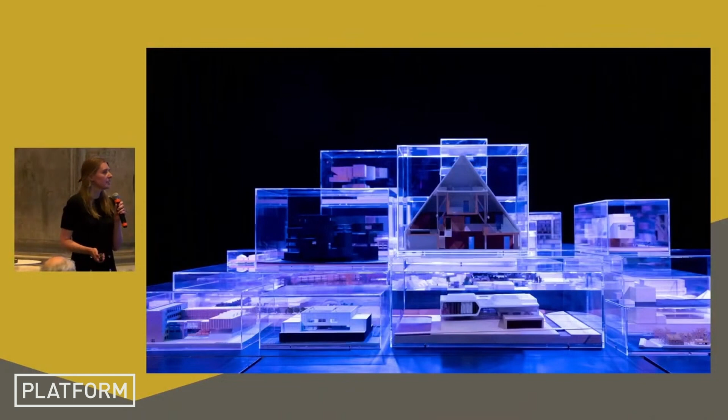What you can see is that every project is unique, and every project is unique because of a close collaboration with the users and with its context. What we find very important is that every project is tailor-made for the users, and that every project can also adapt over time, so that it can be in constant transformation.

We call it a cultural multiversum. And this cultural multiversum exists of a collage of activities, of atmospheres and scenes that you can also see here. And this constant collage is changing over time.

Basically, what you can see here, this is the timeline of the movie that you saw just before, because for us, a project and a building that is in constant use is the most sustainable to use effectively.

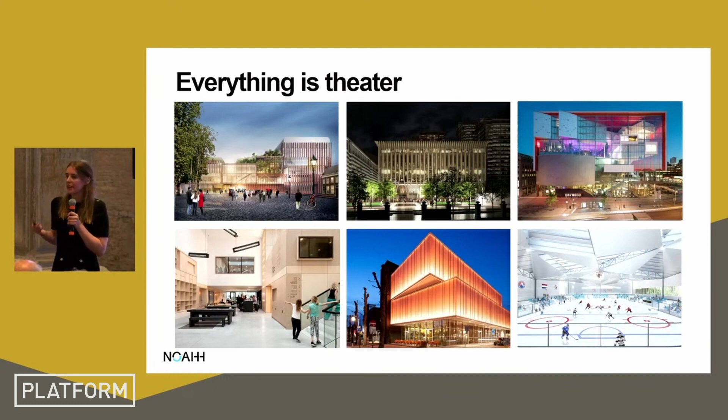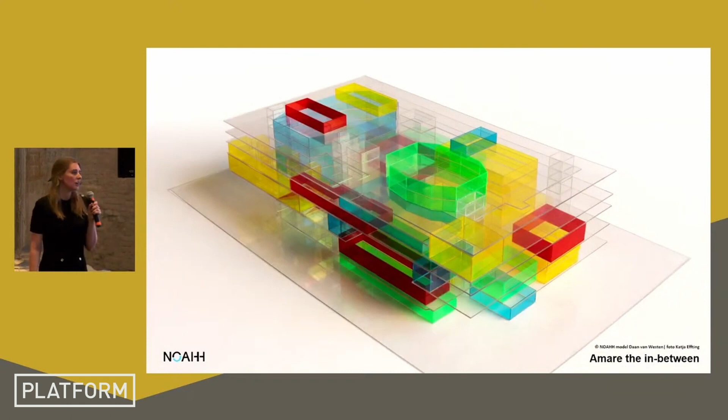And if we are talking about Amare, the building that we show on the exhibition, and where Patrick will also explain a bit more, is that this building is full of different small theater halls, and they can pop up and disappear in time. It's basically about the in-between space.

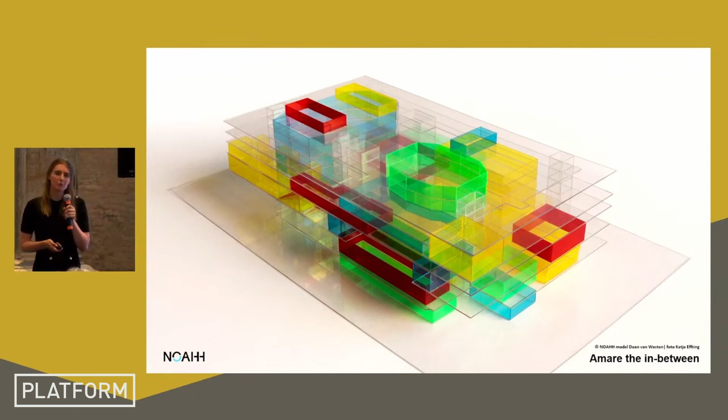It's not only about the main halls that you can see here, the different halls that are a close collaboration with the users, but it's basically about the spaces that are in between, and where different activities and different experiences can happen. So you can never experience everything in this building, so it means you always have to come back.

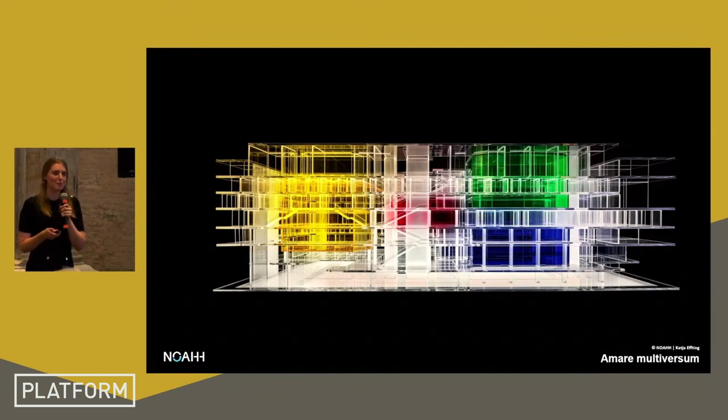This is a model that we have made, and you can see basically the link to the lava lamp that I just showed. So you can see also how this space could be fluid.

And we captured our Interstellar, our cultural multiversum in many different models, more than 100 different models, because we cannot explain this whole building in just one model. So we created an exhibition, also in collaboration with Luca Molinari, where we experience basically all different parts of the story and all different little tessellations of the building.

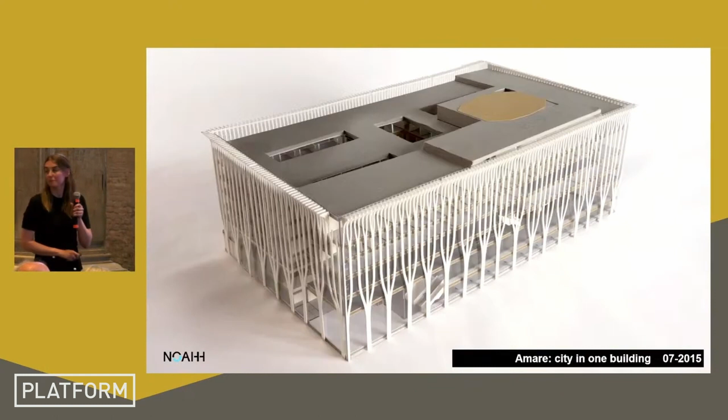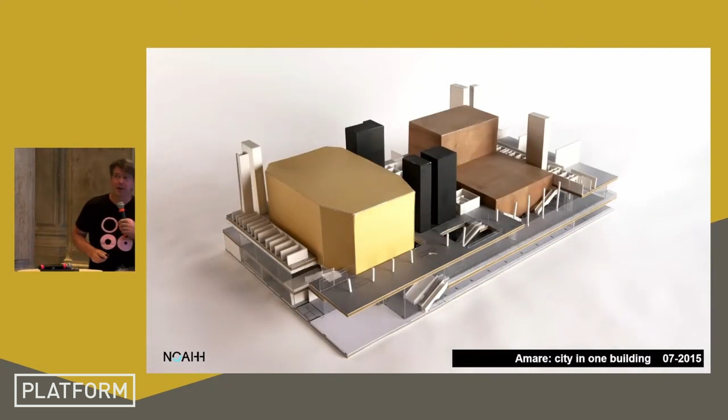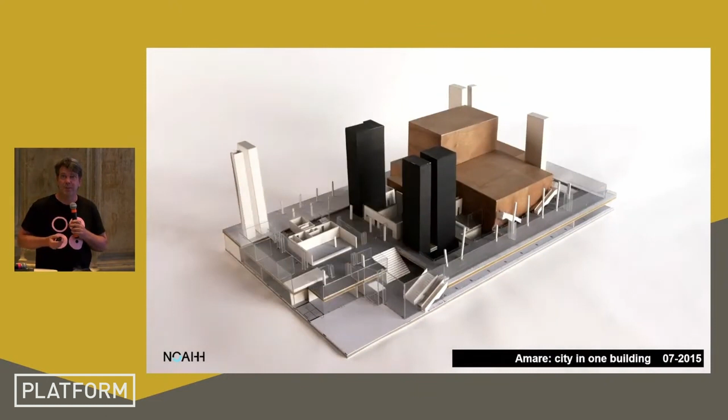Thank you. Talking about Amare, it's not a building - we consider it as a city within the envelope of a superstructure. It's like an inversed Piazza San Marco, whereas the facade contains all the elements like a city within a central, binding, identity-giving facade. But the interesting part is that this is the facade, and within this there's a new city.

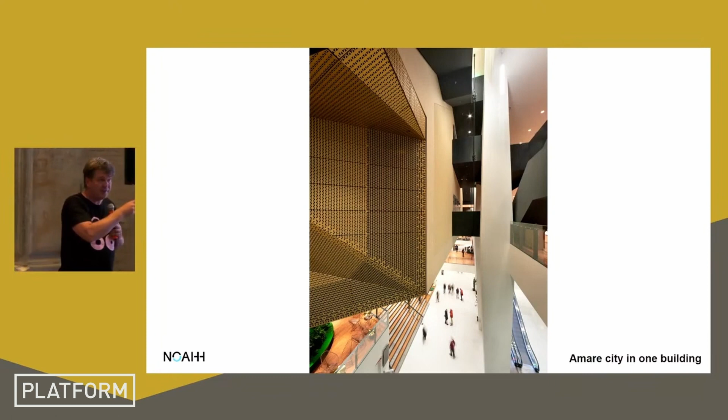Basically like in this building where on the attic we have seen that was a baseball field once, and it can be used in multiple ways during time. Inside this facade you can find these parts of the building - it's a kind of completely different world which can be experienced and explored in many ways.

In the building you can see that there is street theater and activities popping up, not organized, very informal, attracting like the informality in this drawing you have seen. It can also be sketched in this building, so that there are professionals acting, students working, people from the neighborhood playing, and they all do their activities during time at the same time - so there is so much to do that it can never be experienced in one moment.

The director of the dance theater is also telling that she is very inspired by these new visitors, and they changed their performances related to that. So the building itself stimulates new experiences and new ways of creating culture.

This is an art square where you can see students doing a course, and then in the evening there are ladies from the neighborhood having a salsa festival - they all use the space just after each other in multiple ways. And the same for the main protagonists, the main building parts.

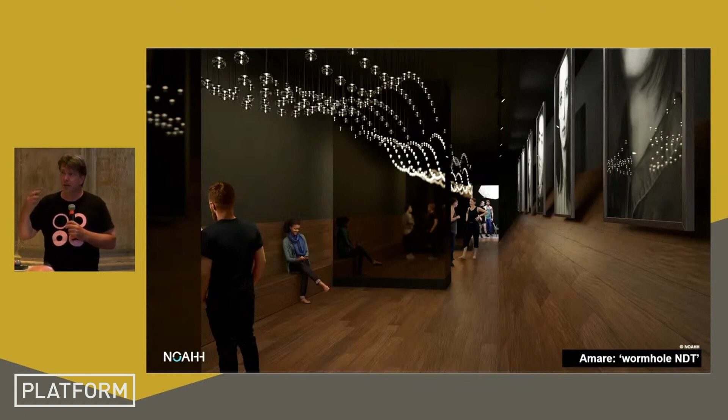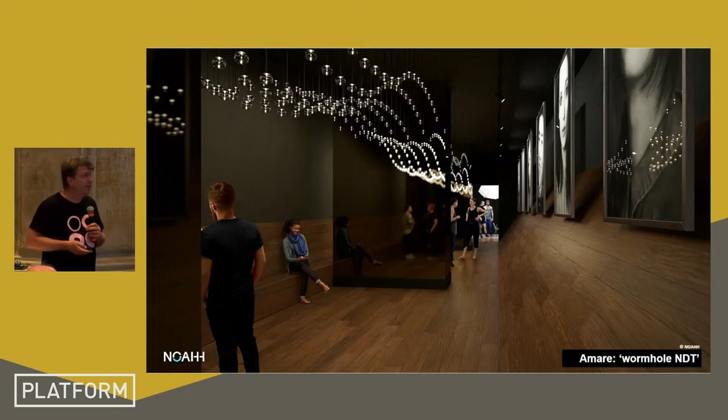What we really like is to design these wormholes, so to go from one hall to the other, and that when you do a festival, you can experience everything in a second or in some minutes.

What we can see is that wormholes are also being used in different ways than we imagined. We thought it's for a kind of art gallery, and suddenly it's used for ping pong, for dancers who here in the evening do a very professional dance on this diagonal platform, and parallel to them there is this pop concert.

So it's a world of culture, and we designed it not for the architecture basically, but as a city, with rules that people may use the building in multiple ways, and also guest players play there.

What we see is that not only music and dance is performed, but also video art is part of the building, became part of the building, because video can also be interpreted as a kind of expression of the music itself, exposed as mapping in the building.

It's very interesting because then the building starts changing in architecture, like we visualized in this model, so that you can never explore it in the way you imagined in the beginning - it's a daily ongoing change. This exhibition is now so popular that it will move from the Amare to the City Hall, and hopefully it's also in constant change like the building itself.